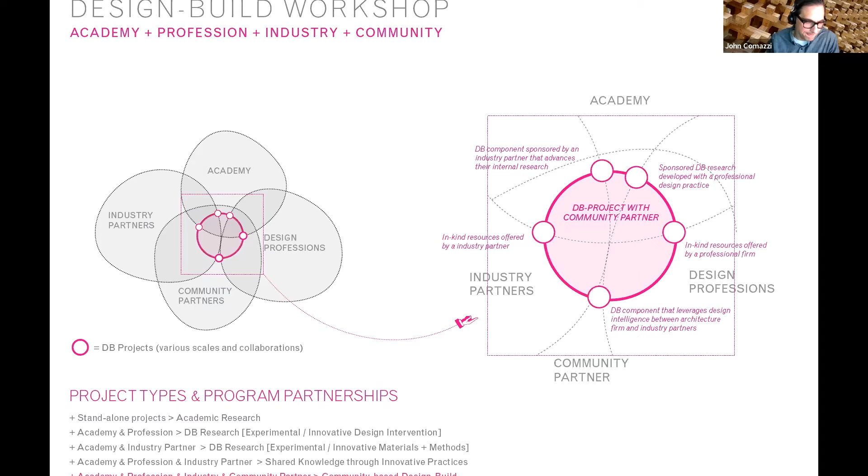Students will work in small teams to produce a comprehensive design research manual that will include historical analysis, site documentation, material prototyping, precedent studies, budget projections, code evaluations, and preliminary design feasibility studies.

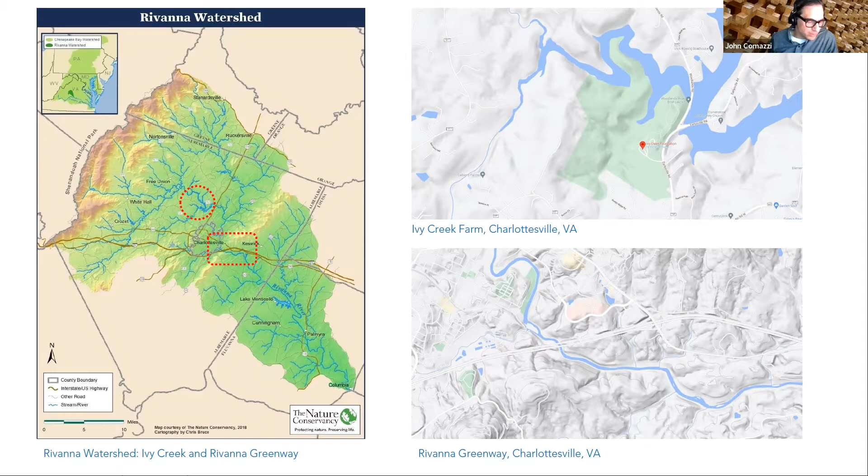For this project, we will work with the Albemarle County Parks and Recreation on several sites to identify opportunities to integrate a series of new structures and pavilions that align with their larger mission of access to their parkland and trails.

In particular, the Ivy Creek Natural Area offers a unique opportunity to collaborate with the Ivy Creek Foundation to advance their educational programming, highlighting the significant African-American history and cultural legacy of the Carr and Greer families who began farming the historic Riverview Farm shortly after emancipation.

In addition to the historical significance of this site, we will also work with the Albemarle County Parks and Rec and the Ivy Creek Foundation to identify opportunities to elevate the ecological diversity and rich natural landscapes for visitors to their site.

The Ivy Creek Foundation already manages the site in partnership with Albemarle County, and they have a rich offering of educational programming, as well as some existing infrastructure to gain access to their parkland. Here you see some examples of that.

In addition to the Ivy Creek Natural Area, we will also work with Albemarle County Parks and Rec to identify other opportunities to open up greater access and engagement within an expanded network of trails along the Rivanna River. In particular, their future planning for the Rivanna Greenway, Old Mills Trail, and the Blueway Riverview Park to Milton trails. We may also find opportunities in other sites throughout the county.

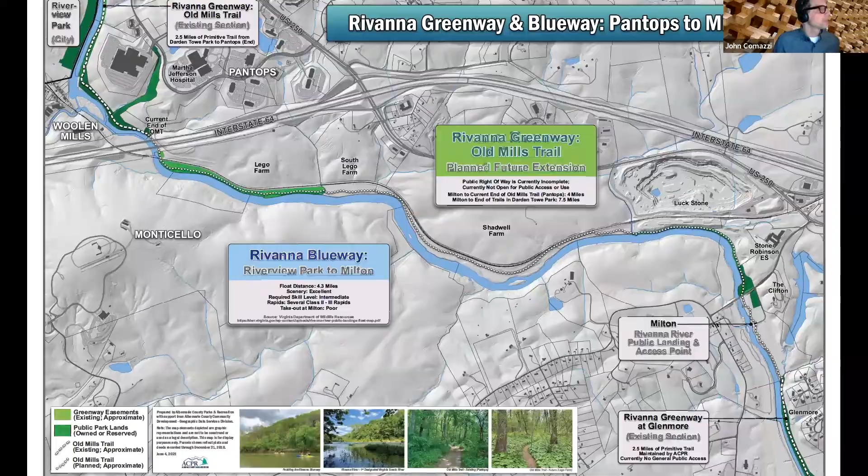Here are some examples of some recent installations and development, and just some of the imagery of the kinds of sites that we will be exploring throughout the seminar.

Students in the course will also collaborate with officials in the Albemarle County Parks and Rec to explore innovative uses and applications for upcycled wood materials sourced from various sites within the county. In particular, the hundreds of large caliper ash trees slated for removal due to the devastating effects of the emerald ash borer beetle.

While we will focus on the unique historic and natural context of Albemarle County, this project resonates with a previous design build project I managed in partnership with the Anoka County Parks and Rec in central Minnesota. What follows is a brief description of that project just to illustrate the possible scope, scale, and design feature of this collaboration with Albemarle County.

This project was in particular sited in the Wargo Nature Center, where Anoka County ran several educational programs for school children, in particular their Heritage Lab, and also the YMCA used this site for a summer camp.

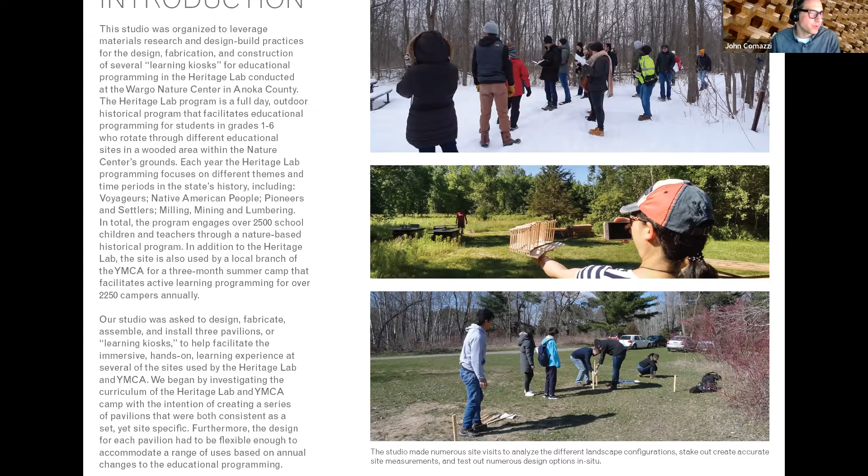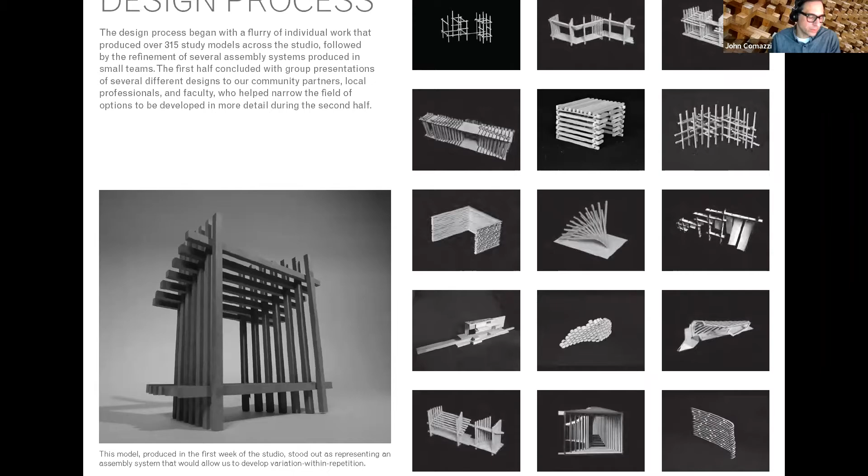That then moved into a design process where the students worked rather quickly to develop a series of over 300 small scale models, exploring all the opportunities of working in particular with wood members.

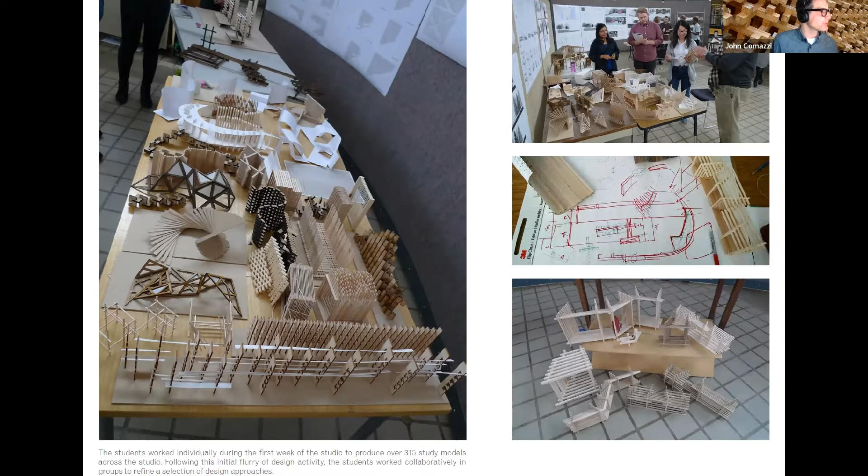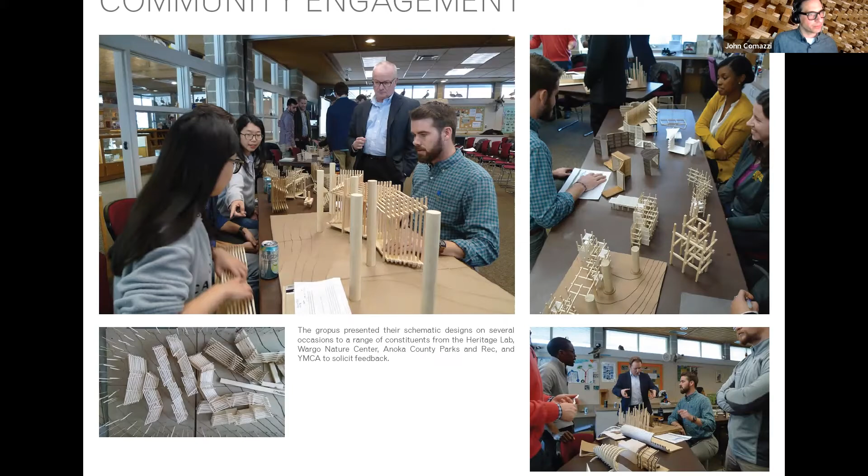Those were ultimately narrowed down to 3 possible schemes in consultation with Anoka County.

So each was then developed in greater detail.

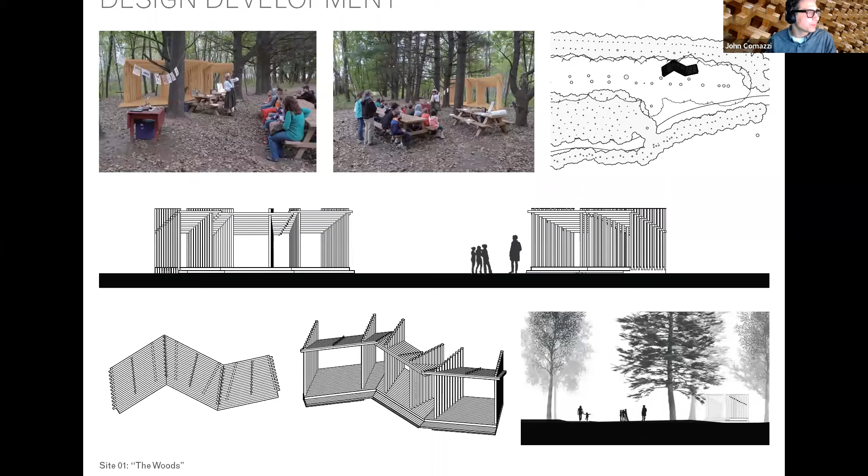After which we were able to develop a series of full-scale mock-ups and prototypes to test the assembly of different components, ultimately building a full-scale mock-up for the final design review.

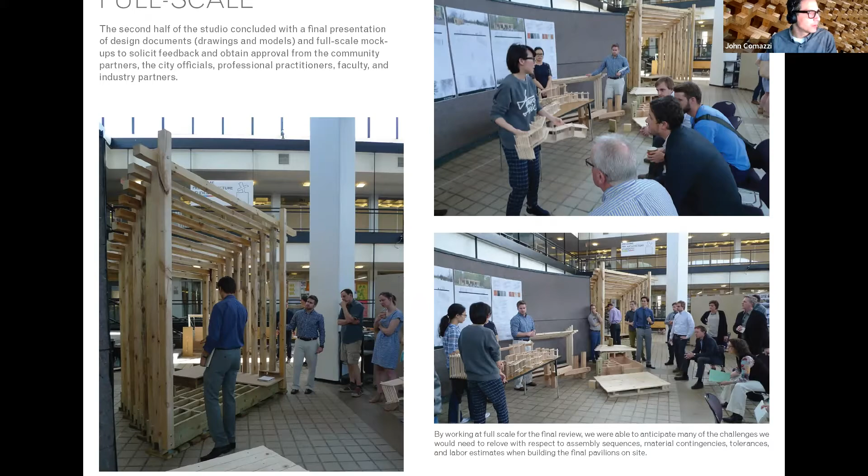And then we also worked closely with a professional structural engineer to meet all of the structural requirements for the county.

Following the design studio that summer, a group of 9 students and myself prefabricated as many of the components as we could in the school's shop. It was about an hour away from the site.

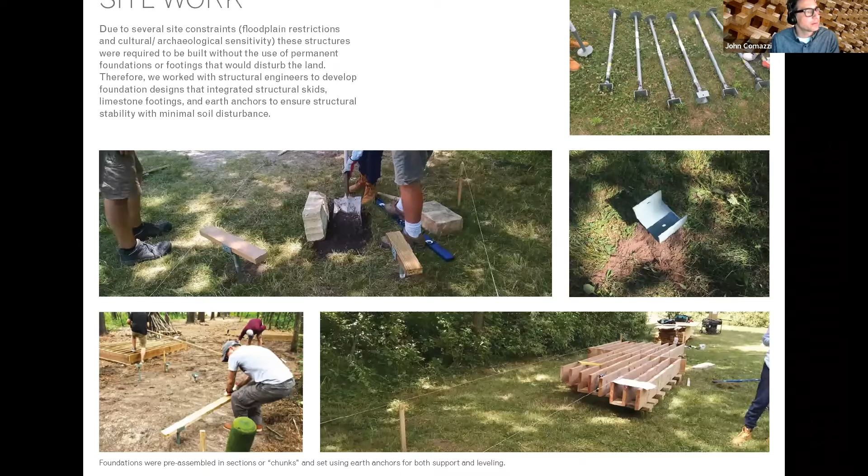And then installed and assembled each of the pavilions on site over about a 4-month period. Here you see some of that installation process.

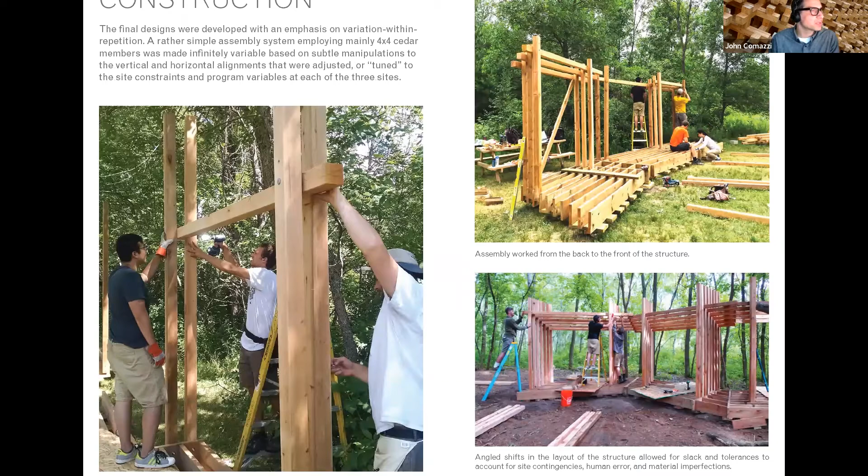Here are the 3 pavilions completed, and then being used here by both the YMCA summer camp and the Heritage Lab educational programming.

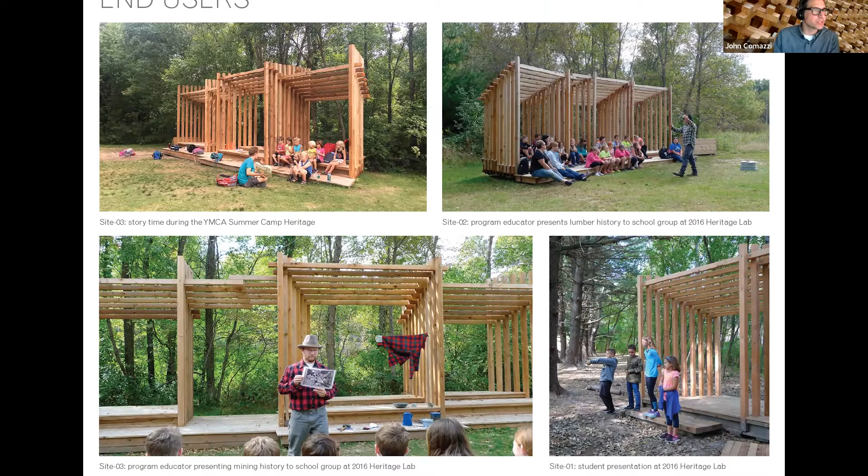There was a 4th pavilion that was designed for the YMCA's archery range.

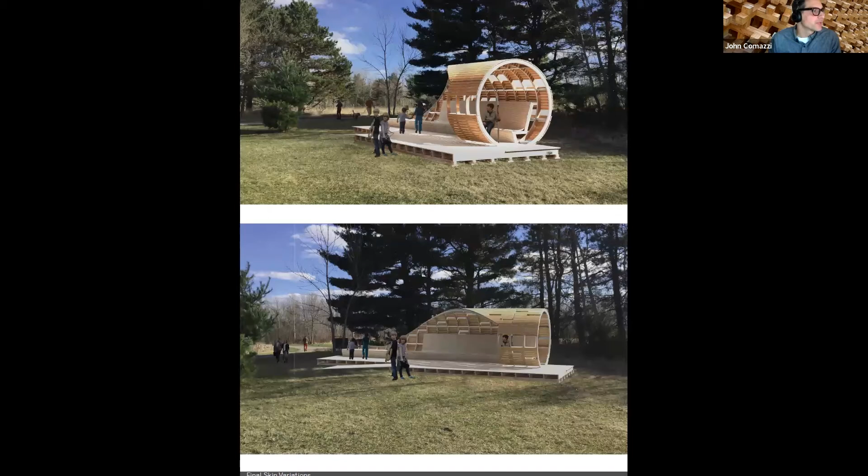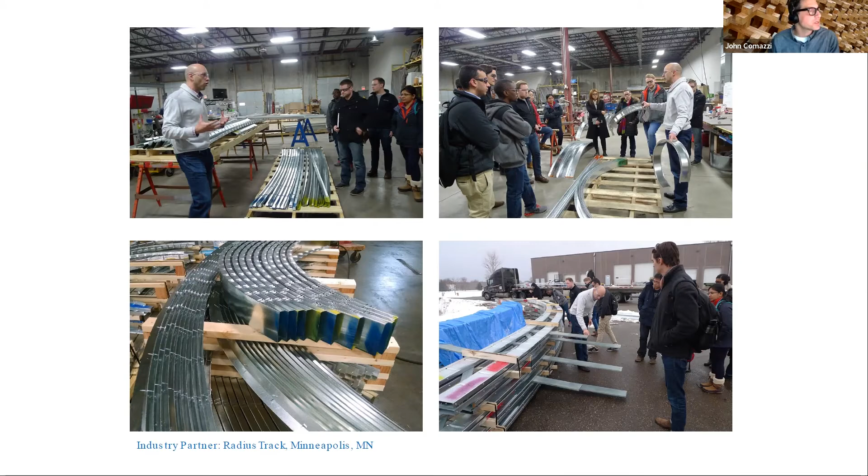And for this pavilion, we worked closely with 2 local industry partners, Radius Track, who specializes in custom bent light gauge steel, and MG McGrath, an innovative sheet metal fabricator.

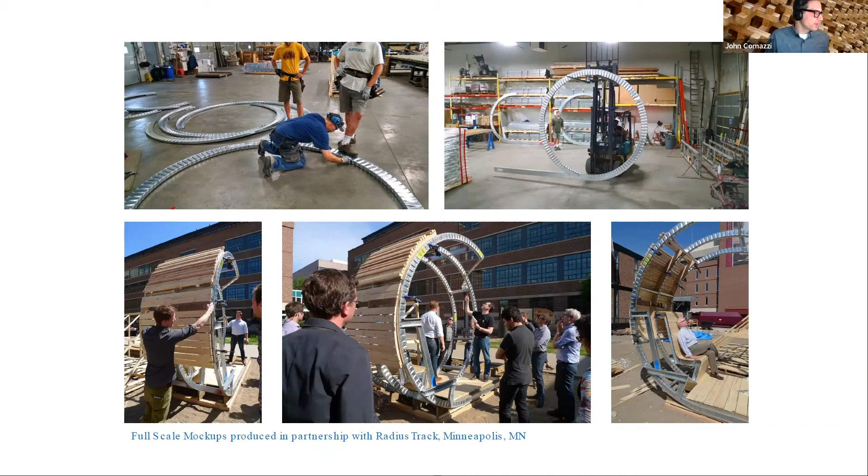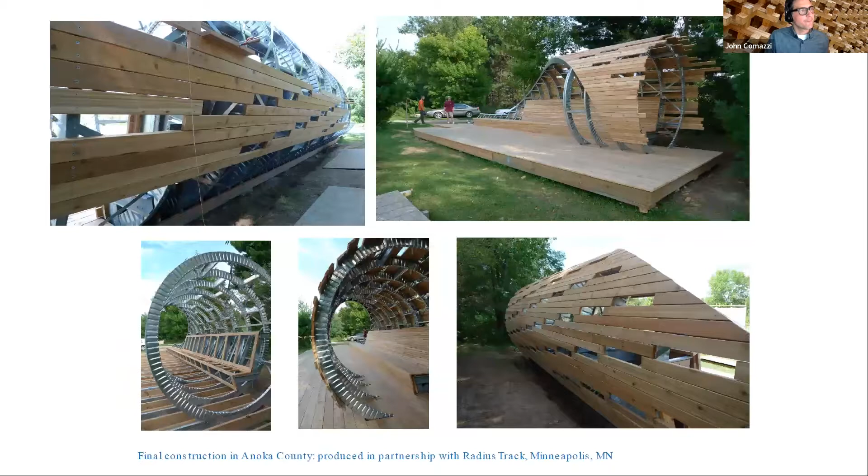Here you see some of the process of constructing the full-scale mock-up produced for the final review, and then some of the installation and construction photos, and the project after completion.

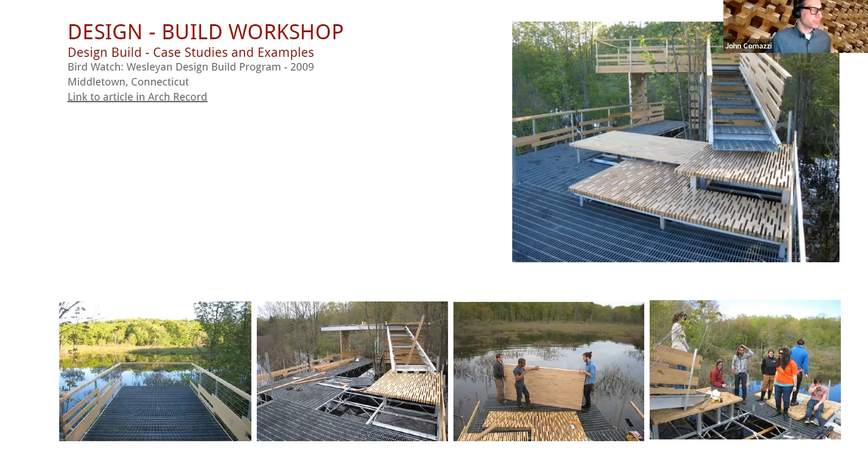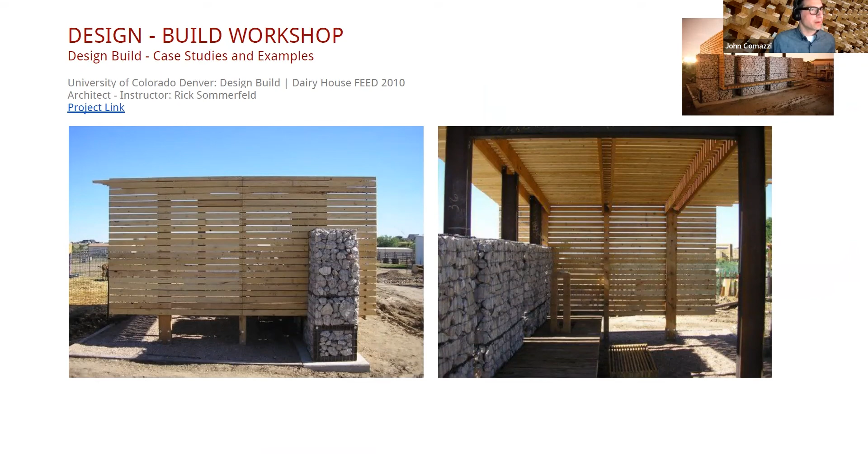In addition to that project, of course, we'll look broadly at other examples in partnership with Albemarle County to identify the kinds of projects, the scope, and the scale of work that may be appropriate for their particular sites. And these are just some other examples of projects that we will delve into more deeply throughout the research component of this seminar.